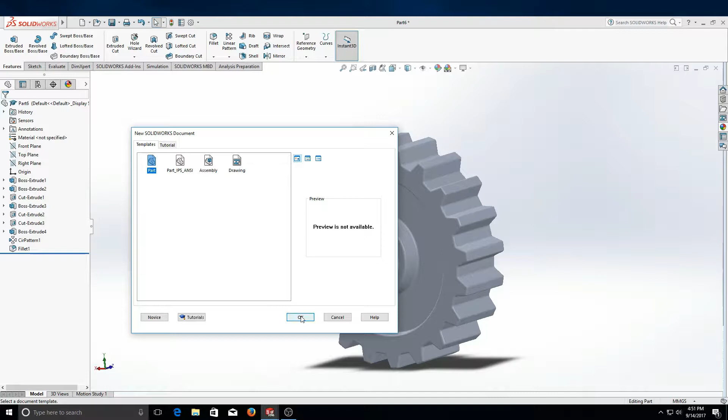Click File and New in SolidWorks once you open up your program. Click Part, click OK. Now the first thing we're going to do is establish our units for measurement. On the bottom right of your screen, click MMGS. Use MMGS because we're going to be dimensioning this part in millimeters.

Select front plane. Under the sketch bar, click Sketch. Zoom in by scrolling your scroll wheel in or out. Press Circle. From the origin, which is the center of your plane, draw a circle of arbitrary size.

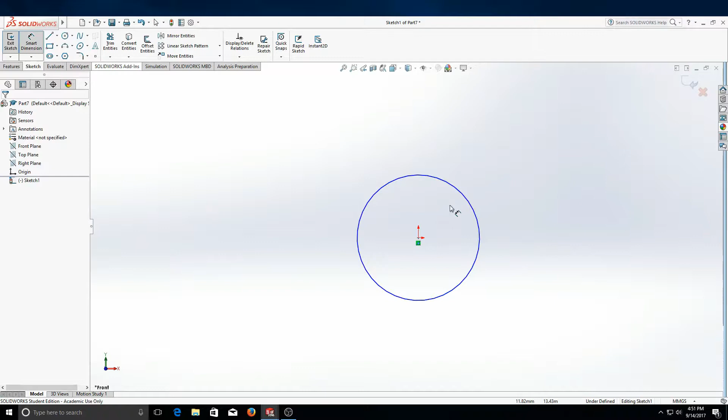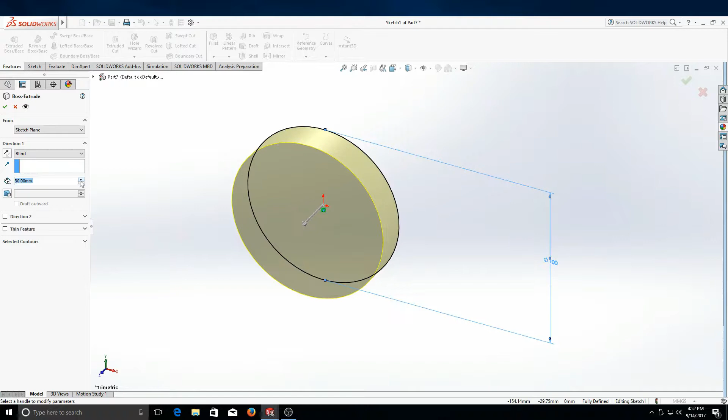Click Smart Dimension. Click the edge of the circle and type in 100. This defaults to millimeters because of the system we chose, and press Enter. Under the Features tab, click Extruded Boss/Base and extrude this 30 millimeters in the blind direction from the sketch plane.

Click your front face, press Sketch. Press Ctrl-8 on your keyboard, and this will rotate the piece so that the face you are currently sketched on will be normal to you.

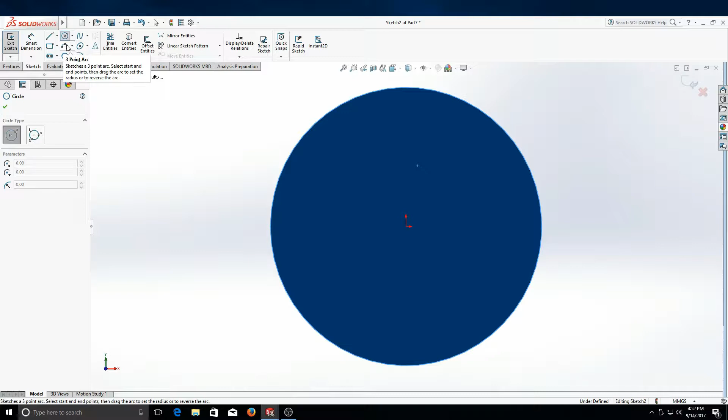Click the Circle tool, draw another circle, and let's do the same thing. Let's dimension this one, except this time we're going to dimension this 30 millimeters. Unclick Smart Dimension, go to your Features tab, Extruded Boss/Base from the sketch plane in the blind direction. Let's extrude this 5 millimeters.

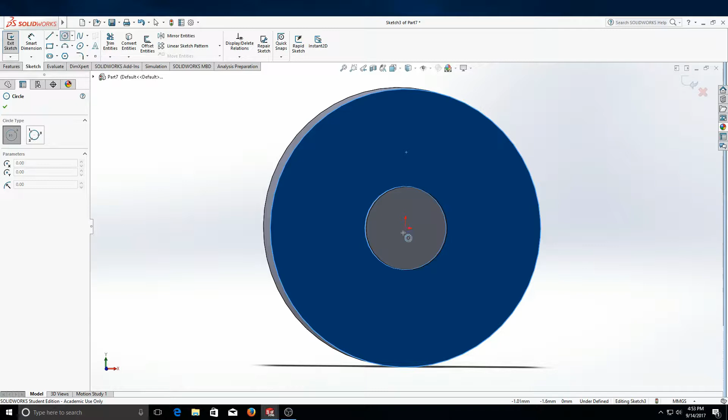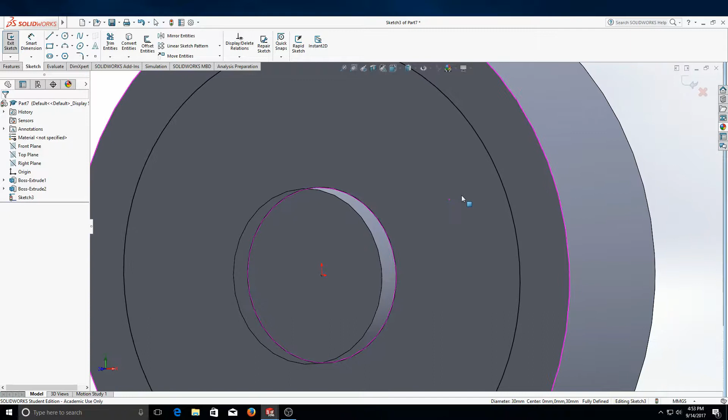Click this face here, Sketch, and another circle from the origin. Smart Dimension, and dimension this circle 80 millimeters. Uncheck Smart Dimension. Our next step is to click this circle here, press Convert Entities. This will convert a line segment from a previous sketch into your current sketch.

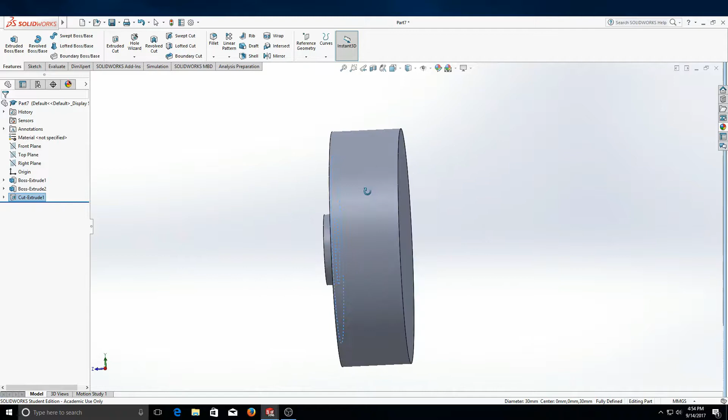Click the Features tab, and this time click Extruded Cut. We want to cut this 5 millimeters from the sketch plane in the blind direction. So this is the front face of the gear so far. We want to mirror what we've done on this face on the back face, and we're going to do that by converting these lines to the back face.

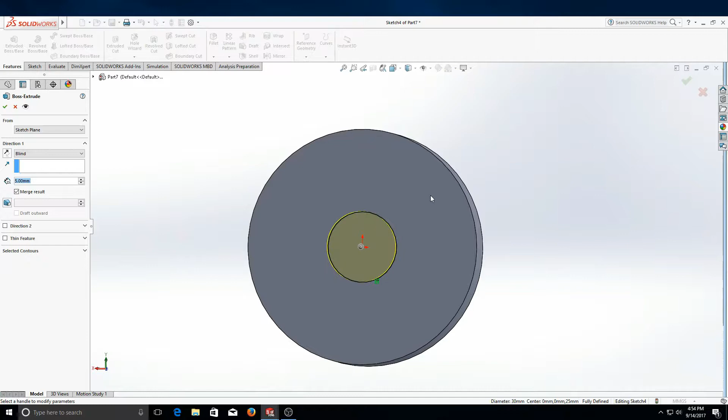So rotate this piece, select your back face, sketch, and then convert some of these circles. We're going to use this inside circle again, convert entities. Features tab, Extruded Boss Base, extrude this from the sketch plane in the blind direction, 5 millimeters.

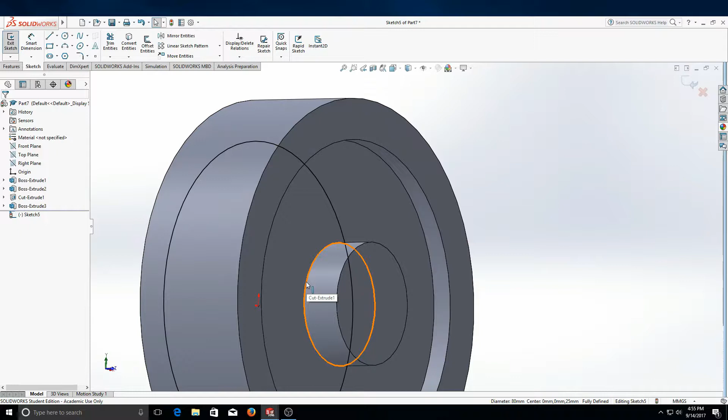Select this face again, sketch, convert the larger inner circle this time. Select it, convert entities. You also need to select this inner circle and press convert entities. Click the Features tab, Extruded Cut, sketch plane, blind direction, 5 millimeters.

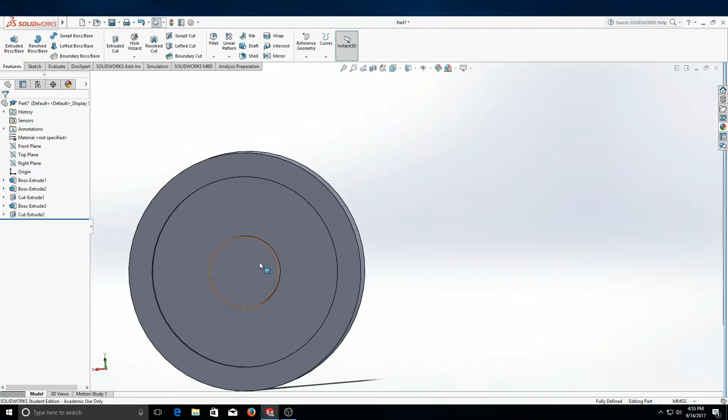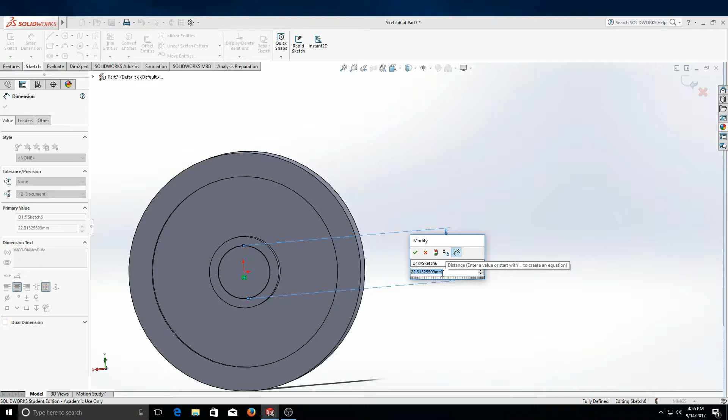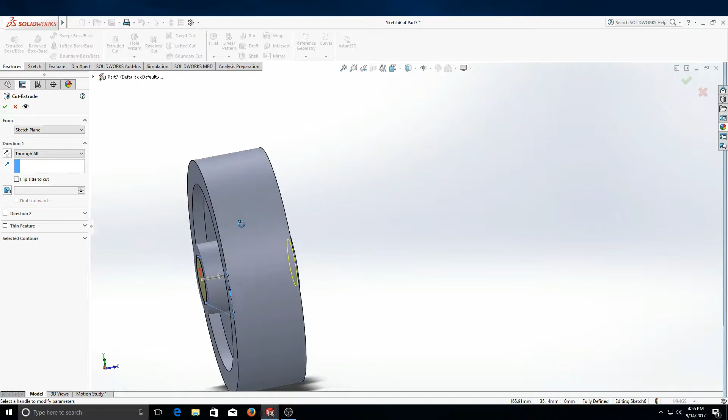Select this face, sketch, and we're going to draw one more circle. Under the Smart Dimensions tab, we want this circle to be a diameter of 20 millimeters. Uncheck Smart Dimension, go to the Features tab, Extruded Cut. From the sketch plane, we actually went all the way through for this segment, so put a hole through the entire part where an axle will go through. So this is the gear so far. The next step is to add the teeth to this gear.

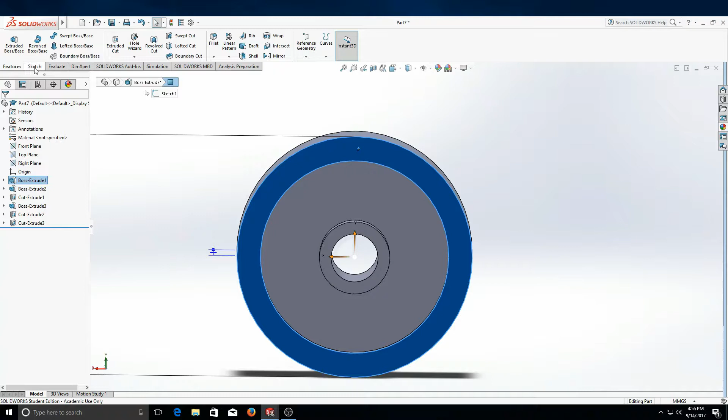Click this face, Sketch tab, Sketch. Zoom in up top, make the screen normal to you, you can also. Click the line tool and make an arbitrary shape similar to the one I'm making now. Right click and press select.

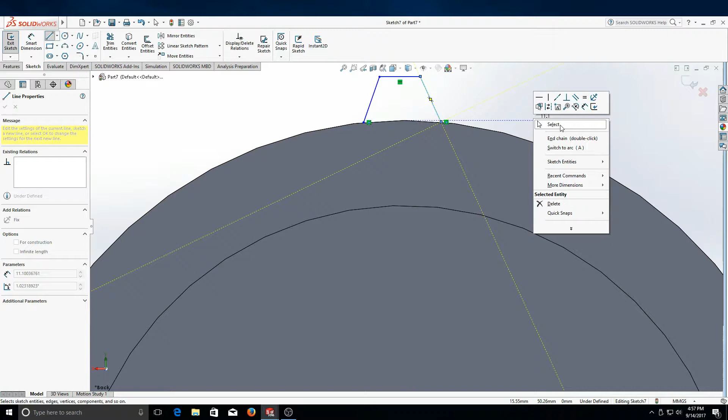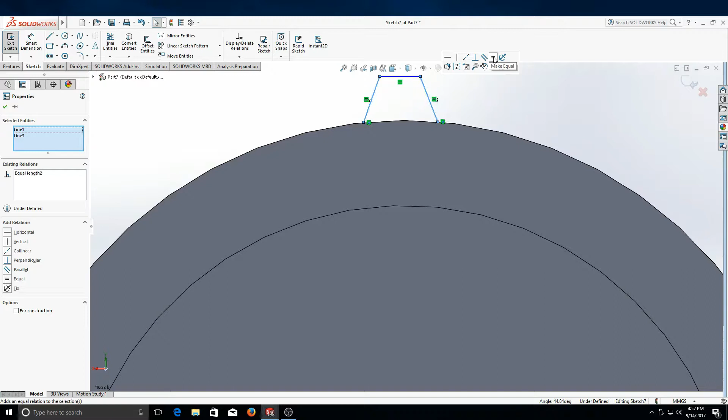Now we need to define some relations for these lines. Press the control key, click this line and this line, and a little toolbar will come up with relations you can add. We want to make these two lines equal. Another relation we want to add is to make sure the endpoints of these lines are coincident with this outer circle, shown in this green box. If the green box isn't showing up for you, click the end of the line, click the outer circle, and press the Make Coincident button. Do the same thing for this side.

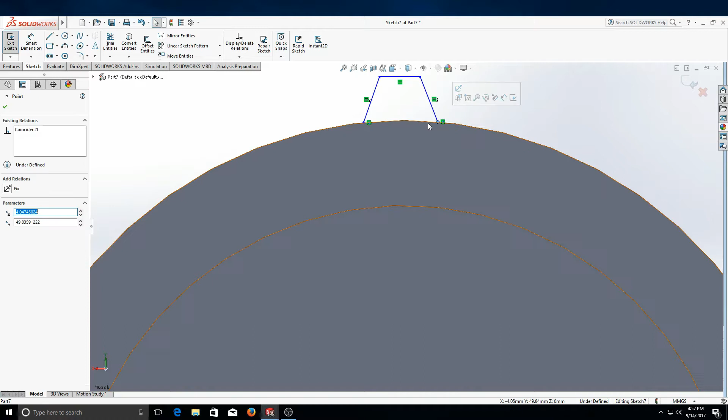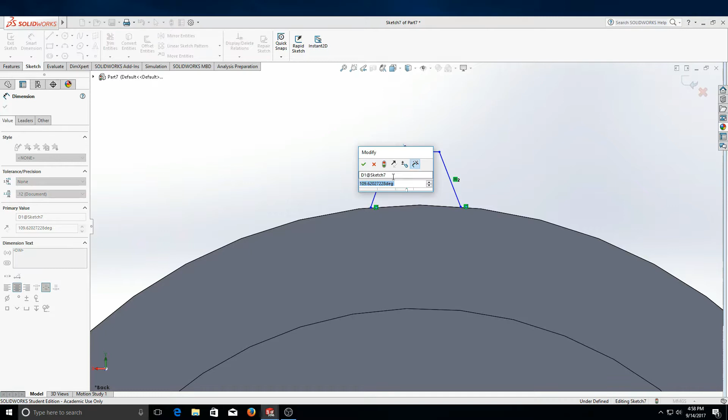Now let's dimension the tooth. Select this line and this line. We want to make this interior angle 110 degrees. And the same thing for this interior angle. Select the top line and the right line. Make this interior angle 110 degrees.

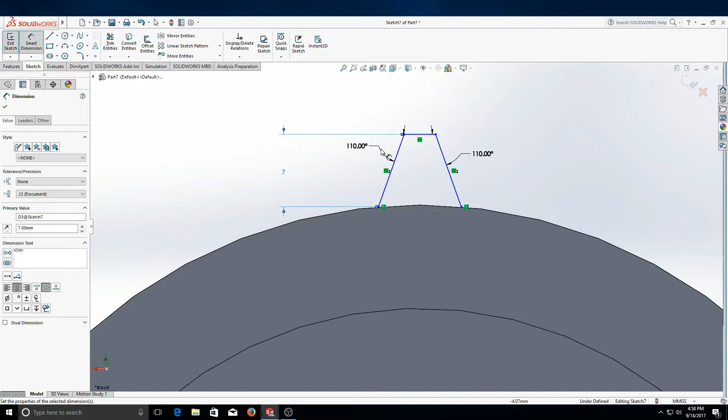The height of this tooth will be 7 millimeters. The width of this tooth will be 5 millimeters from the top. Now the sketch is fully dimensioned, ready to extrude it.

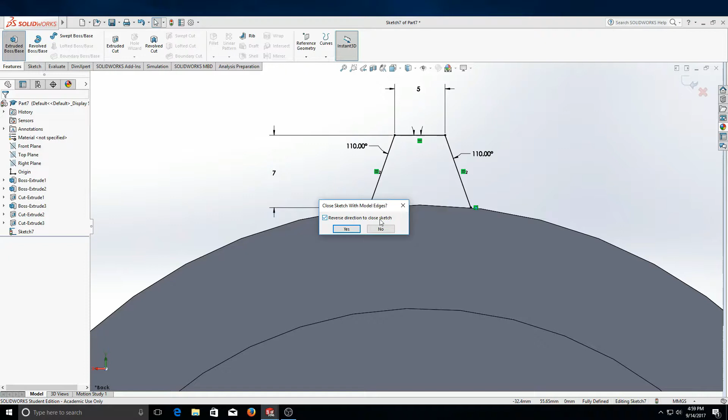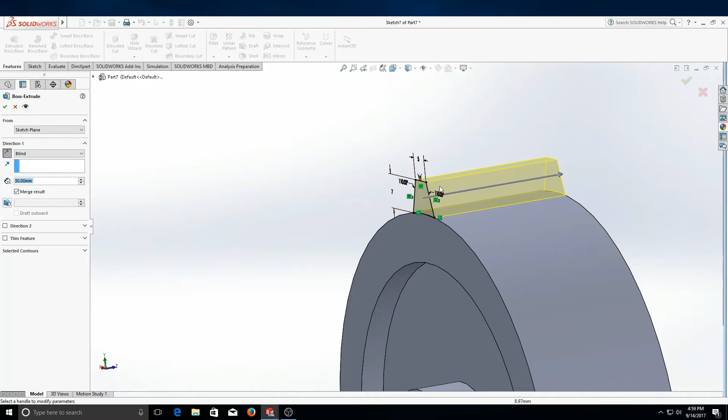Check reverse direction to close sketch and press yes. Now to extrude this tooth from the sketch plane, reverse the direction while still keeping blind as the direction. Press the reverse direction button here. Since this piece has a width of 30 millimeters, we need to extrude this tooth a width of 30 millimeters. Make sure merge result is checked, because if it's not checked, these teeth will be additional pieces and this whole gear will not be one solid piece.

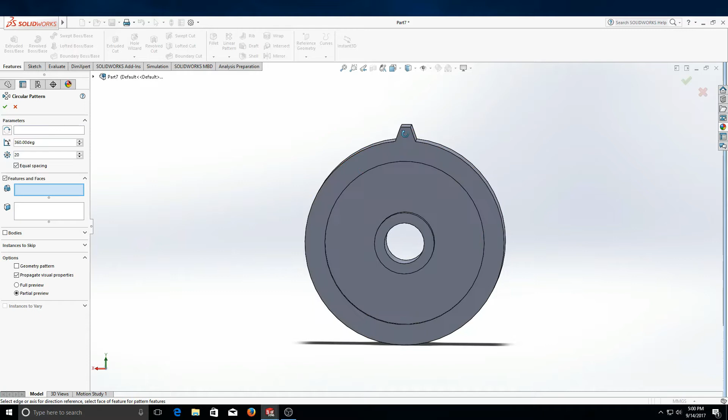The next thing we need to do is make teeth around the whole gear. Rather than doing that by hand, which would be tedious and tiresome, we're going to use the Linear Pattern tool under the Features tab. Click Linear Pattern, press Circular Pattern, click a segment that says Boss Extrude 4, and then click the Parameters box, and click the outermost circle as your parameter, which is edge 1. We want to make 20 teeth in equal spacing. Once you have this parameter set, click OK.

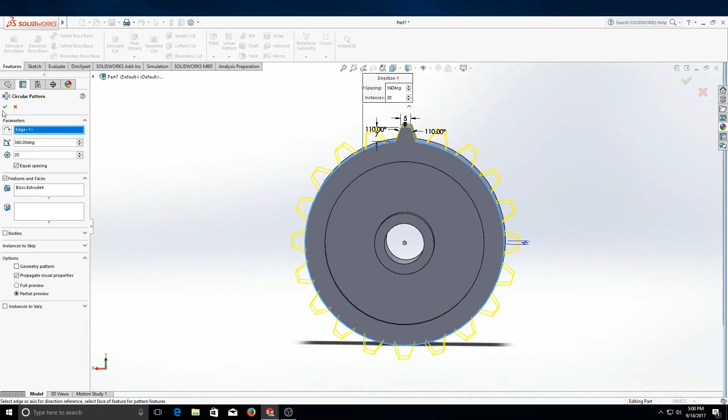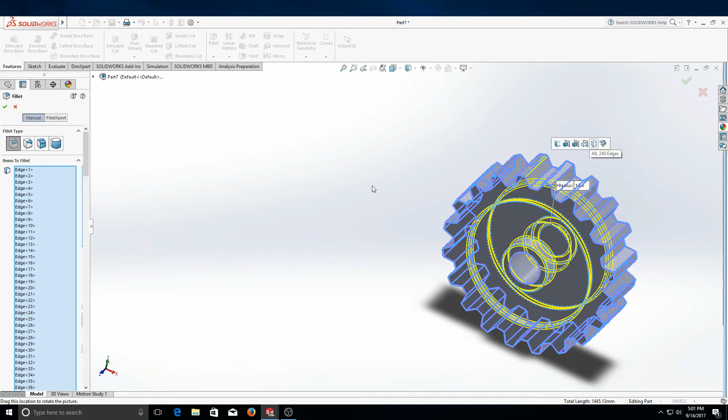Then when you get to the teeth, click an edge on the tooth, and then in the toolbar, press all 240 edges. Click OK. So that's the gear. I'll show you it from the isometric view.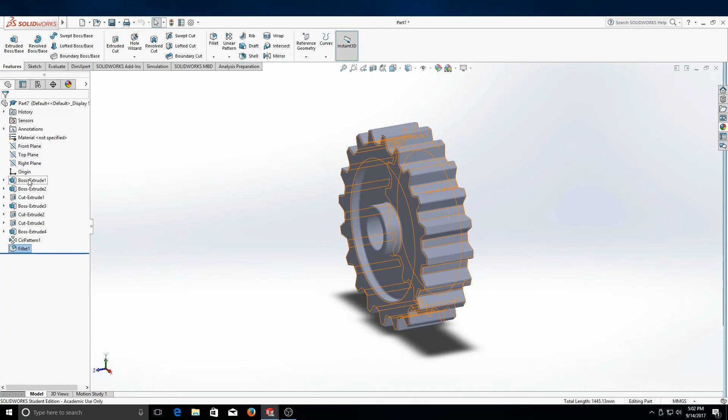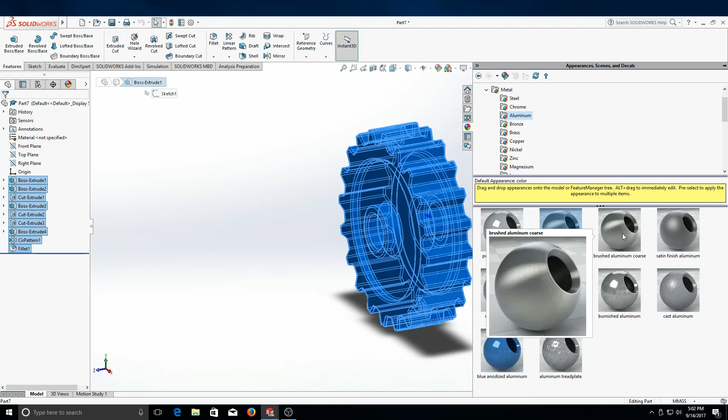The last thing that we're going to do is assign material to this. Come over to your sketch panel and highlight every feature you've added to this part so far. Go to the right side of your screen under the Appearances, Scenes, and Decals tab. Click it, choose Metal, Aluminum, and let's choose Satin Finish Aluminum for this piece.

And there you have it. That's how you design a basic gear using SolidWorks. Thank you.